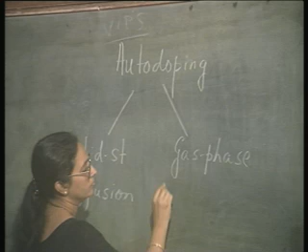Now, there are two reasons for this inadvertent doping or auto doping. These two reasons are: one is due to solid state diffusion, and the other is due to gas phase autodoping. What are these two things basically? See,

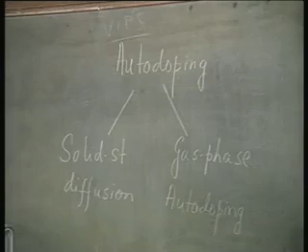before the epitaxial growth takes place, the sample is being treated to high temperature. At that high temperature, it is possible for the dopants already present in the substrate to out diffuse, and this will change the composition of the gas stream. The gas stream composition is controlled depending on the level of doping in the epitaxial layer that you want to grow. You want to put that amount of boron or phosphorus or arsenic along with silicon, but the already present dopants in the substrate layer will out diffuse and modulate the composition of the gas stream.

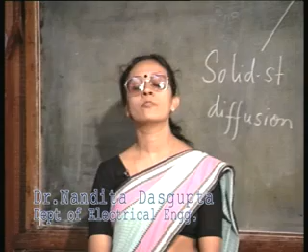So when the epitaxial layer is being grown, these dopants which were originally present in the substrate can now get reintroduced in the epitaxial layer. Thereby, the doping concentration of the epitaxial layer will change. It will not follow exactly the required doping level. For example, if my substrate is doped p type, and I want to grow an n type epitaxial layer, near the interface I may have a problem of having first a slightly p type epitaxial layer growing and only then the n type layer growth. We will explore these possibilities later.

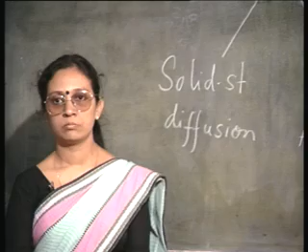The other thing is of course solid state diffusion. That is, as the epitaxial layer is being grown, if the doping concentrations of the substrate and the epitaxial layer are widely different, as in most cases they are likely to be, then there will be a diffusion from the higher concentration side to the lower concentration side, and that will also modulate the deliberate doping concentration of your epitaxial layer.

So, both these effects will cause a change in the doping concentration of the epitaxial layer, and therefore, it will put a limit to how thin a layer you can actually grow with proper control of doping, because there is going to be a transition layer between the bulk and the epitaxial layer, which will be determined by these effects of autodoping.

If we look at the first card we have here today, the dotted line signifies the ideal abrupt junction between the epitaxial and the bulk region. Ne is the epitaxial layer doping concentration, Ns is the substrate doping concentration. Let us assume that they are both the same type, only the doping concentrations are different. In this particular case, I have assumed that the substrate is doped highly and the epitaxial layer is doped to a very low extent, it is almost intrinsic.

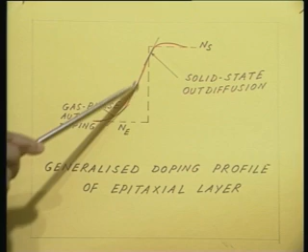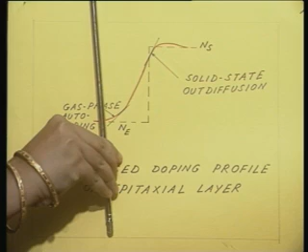Now, in this particular example, I have chosen the epitaxial layer and the substrate to be of the same type. Let us say the epitaxial layer is N type, the substrate region is N plus. So, what I have is just this extended transition region, and that actually determines how thin an epitaxial layer I can grow with the proper Ne doping concentration. You see, from this figure it is obvious that up to this is my transition layer, and only after that I have the epitaxial region with the proper doping concentration.

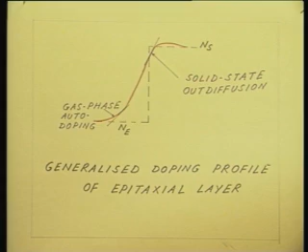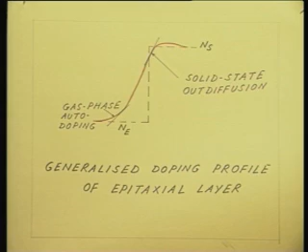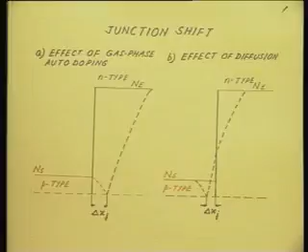The situation can be even more serious if the two regions are of opposite dopant type. That is to say, if I have a substrate and an epitaxial layer, one is P type and the other is N type. In that case, what is going to happen is called a junction shift. That is, the metallurgical junction and the electrical junction will not be at the same position. By metallurgical junction, what do I mean? Suppose my substrate Ns is p type, and my epitaxial region Ne is n type, then the metallurgical junction is present here, this black line, that is my junction point. It should be the metallurgical junction exactly at the transition point.

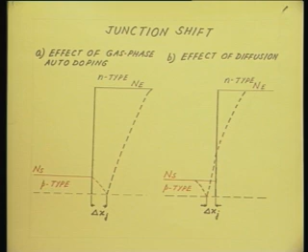But because of the effects of auto doping, the junction can get shifted either way. The figures I have here are not actual figures, they are the results of computer simulation, and in these two figures we have tried to separate out the reasons of auto doping. The first figure, if you look at that, is the effect of gas phase auto doping. Let us look at what is happening. I have the substrate with a doping concentration Ns, it is a p type substrate. Gas phase auto doping is the effect that, before the epitaxial layer growth, when the substrate is being heat treated, some of this p type dopant will escape, it will evaporate and it will modulate the gas stream.

Okay. So, some of the p type layer is escaping and getting reintroduced into the epitaxial region. This red dotted line shows that the p type dopant is reintroduced in the epitaxial region, and that is why even though I wanted to grow an n type epitaxial region, near the junction I find that the junction has actually got shifted into the epitaxial region. The p type region has actually extended inside the epitaxial region in figure A. Do you notice that this red region has extended into the epitaxial region, and therefore, the junction is now here. The delta xj denotes the amount of the shift. So, this is the effect of gas phase auto doping.

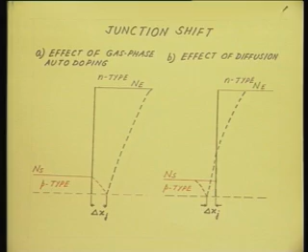These are, as I said, the results of computer simulation, in which we have tried to isolate one effect and study only that, either gas phase auto doping or solid state diffusion. In a practical situation, both these effects will be present. So, which way the junction shifts will depend upon their relative dominance. But that is a very important problem, that the electronic junction may be shifted from the metallurgical junction.

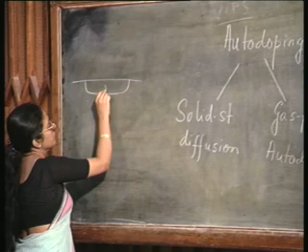So, these are the effects of autodoping. In this particular case, of course, we have considered only vertical autodoping, that is, the region immediately above the substrate is getting doped. For example, if I have an n plus region and I grow an epitaxial region, then this is the portion where the effect of autodoping is going to be felt. The shaded region is the region where the effect of autodoping is going to be felt.

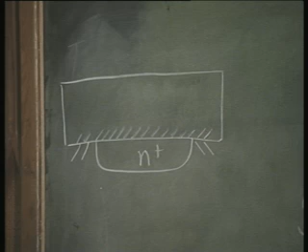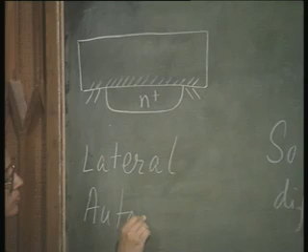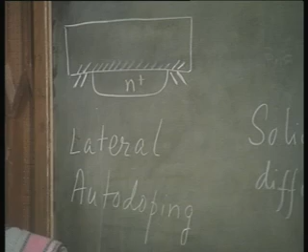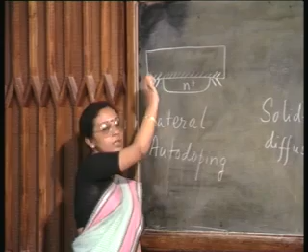This is vertical autodoping, but actually the effect will also be felt to a region adjacent to the substrate. In fact, all over here the doping concentration will get modulated. This is called lateral autodoping. Lateral autodoping is almost exclusively due to gas phase autodoping. The solid state out diffusion plays very little role here. Before the epitaxial layer is grown, when the substrate was being subjected to heat treatment, the dopants have diffused out and they can be reintroduced all over this place, and from there can get reintroduced into the epitaxial region.

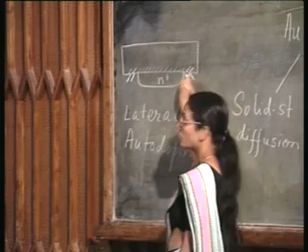So, these are the effects of autodoping, and lateral autodoping is something one should be very careful about, because it may cause an electrical short between two adjacent devices. See, this is an n plus region, the next n plus region may be further off here, but because of the lateral autodoping all the n plus regions can get connected. So, unless you take proper precaution to isolate between the two n plus regions with a boron diffusion or something like that, there is a possibility of getting an electrical short due to lateral autodoping. Okay.

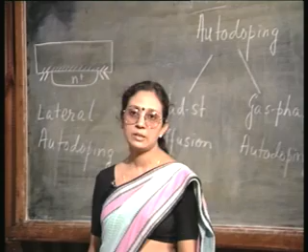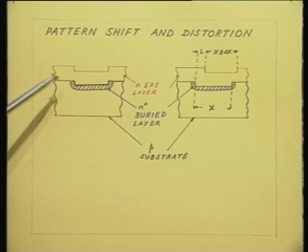So, now if I grow an epitaxial layer, I would expect it to be aligned with this step, because everywhere I am growing, say, 5 micron from the substrate. So, this height should be 5 micron. This proper alignment is going to play a very important role in my further processing, because once the epitaxial layer is formed, I have no way of knowing where the underlying buried layer is. This step is only going to tell me where it is, so that I can properly put my base mask and emitter mask, so that the transistor is fabricated in this active region and not this way or that way.

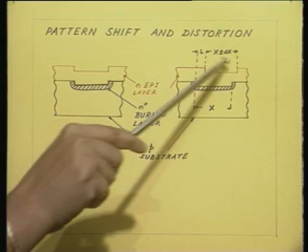So, this is what I want, but unfortunately in most cases I am going to get this figure. Here you see that the step is not aligned, it has got shifted. Also, the size of the buried layer mask may not be the same. Here the length of the buried layer diffusion was x, and the length of this step may be x plus or minus delta x. The pattern on the substrate may get shifted by an amount L, and it can also get distorted by an amount plus minus delta x. This is called pattern shift and pattern distortion.

Now, the question is, why should this happen? Why should this pattern shift and distortion take place? It takes place because, as you already know, the crystal growth is extremely dependent on the crystal orientation. What is epitaxy after all? It is growth of a crystalline layer.

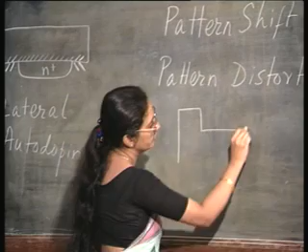So, whenever there is a step on the surface, you are exposing a number of crystal planes at this step. See, the surface may be 100 or 111 or whatever, but whenever there is a step, a number of crystal planes are going to be exposed. And when epitaxial growth is taking place, it is taking place anisotropically, that is, the growth rate is going to be dependent on the crystal orientation.

That is why you do not have uniform growth rate. If you had uniform growth rate, this step will get translated into the epitaxial layer, no problem. But because this growth rate is not isotropic, it is anisotropic, you get all these problems of pattern shifting and pattern distortion. How does one minimize this pattern shift? Minimizing this pattern shift and distortion is going to be quite a crucial point, because this will determine the alignment of my further processing steps.

So, a lot of research has gone in to connect the pattern shift and distortion with the epitaxial growth parameters. And these are some of the findings. Pattern shift is minimized at high deposition temperature. Why should it be so? High deposition temperature means the surface mobility is high. Whenever the surface mobility is high, the growth tends to be isotropic, that is, on all the faces the incoming molecules have enough time to orient themselves. Therefore, on all the crystal planes the growth rate tends to be same. So, if you have high deposition temperature, pattern shift will be minimized.

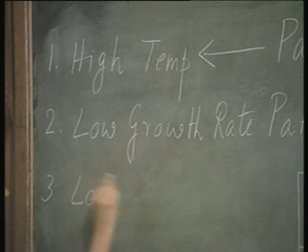It is also seen that the more the amount of chlorine you have, the more is the pattern shift. Again it can be related. The more chlorine you have, the growth rate tends to be high, therefore anisotropy tends to be more, therefore reduce the amount of chlorine and you are going to have lesser problem of pattern shift. A corollary of this third point is that with lower pressure, the pattern shift will be less. With lower pressure, you can vent out the chlorine or the HCl faster. Therefore, the pattern shift will be less.

In addition to this, how the substrate is oriented during epitaxial growth also seems to play a major role. It is found that if you have a 100 substrate, keep the substrate perfectly oriented to its crystal plane, that is, the gas flow should come perfectly along the sample surface. On the other hand, if you have a 111 wafer, then misorient it slightly, by 2 degrees or 4 degrees. That has been seen to minimize the pattern shift problem.

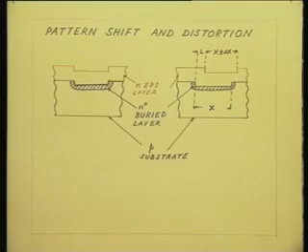Now that we have grown an epitaxial layer, next point is how good is its crystal quality. Let me tell you something. The epitaxial layer is only as good as the bulk crystal is, because you are growing something on top of an already existing layer, and as I said, the term epitaxy itself means arranged upon. The crystalline quality of the epitaxial layer comes about because of the underlying crystalline symmetry of the bulk layer. So, unless the bulk layer shows a very good crystalline symmetry, you cannot expect anything to be arranged upon that.

So, the quality of an epitaxial layer is critically dependent on the quality of the bulk layer. It is only as good as the bulk layer, and very often the quality is really inferior to the bulk crystal. That is because the bulk crystal defects will get translated into the epitaxial layer. During the epitaxy, some additional defects will come into the picture. Therefore, the final crystal quality is likely to be inferior to the bulk crystal quality.

Now, here I have a schematic representation of some of the defects in the epitaxial region. First of all, let us look at this line. By this line, I want to represent an edge dislocation. You know, an edge dislocation is an extra half plane of atoms which can be viewed in 2 dimension as an extra line. So, if this edge dislocation is present in the bulk crystal, as the epitaxial layer grows, this dislocation will simply carry on into the epitaxial region also. It will extend all the way into the epitaxial region.

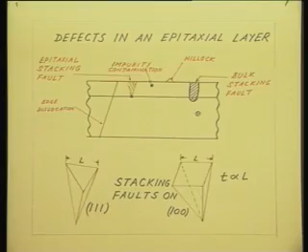In both cases this is true. Okay. Here the side of the triangle I am calling L, here I am calling the side of the square or the rectangle L. This will give you a good idea of what the epitaxial layer thickness is going to be without having to resort to other techniques, a simple ready-to-use way.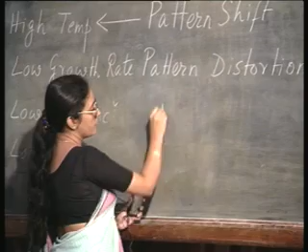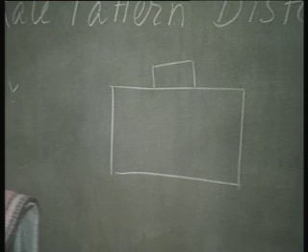So far we have been talking about vapor phase epitaxy in general and vapor phase epitaxy of silicon in particular. I could continue on this topic for some more time, like there is the possibility of having selective epitaxy. Selective epitaxy is something like this. Suppose you have a substrate, you want to grow an epitaxial layer, but you do not want to grow it all over the place, you only want to grow it somewhere here. So, this is called selective epitaxy.

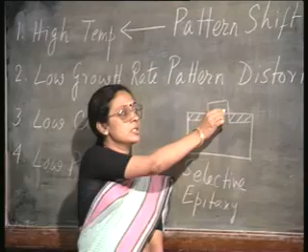This is usually done by covering the regions where you do not want epitaxy to take place with silicon dioxide or sometimes polycrystalline silicon, and then carrying out the epitaxial process, controlling the temperature and the growth rate, so that the epitaxial growth is only taking place on the exposed silicon. See, it is quite simple to understand.

Suppose you have the surface covered with oxide, only there are some windows in which the underlying silicon is present. You remember, the chlorosilane reaction is actually surface catalyzed. So, only where it is coming in contact with the silicon surface will epitaxial growth take place. Similarly, if you are covering it with polycrystalline silicon, then also it is quite simple to achieve, because on polycrystalline the growth will not be epitaxial, but it will tend to be amorphous or polycrystalline.

Okay. So, selective epitaxy is quite an attractive technique, because you can have islands of silicon epitaxial region. Okay. So, the isolation between the devices is going to be quite simple. You have one transistor here, another transistor here, like that. They can be made automatically isolated. Okay. But in principle, they are all the same. They all come under the category of vapor phase epitaxy. Right.